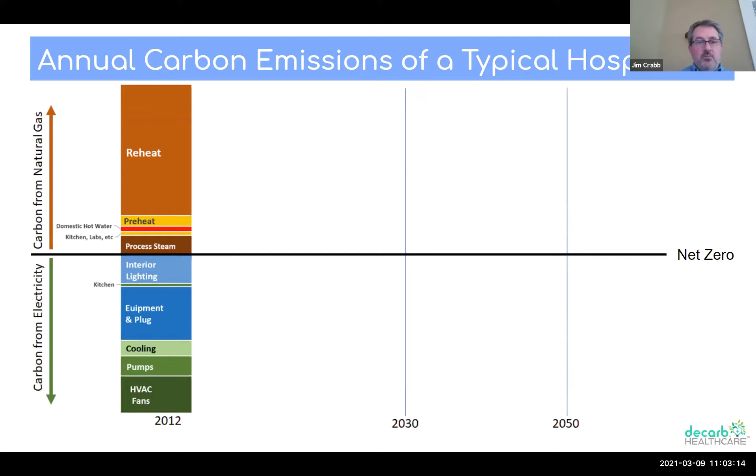Click. I have an automatic clicker here.

In that last session, we talked about ways to reduce reheat. And what I've done here is I've just arbitrarily said we'll cut reheat by 50%. That's a pretty reasonable assumption. We can actually do better than 50%, but let's just start there. We're going to have some reheat probably as long as we have minimum airflows in hospitals. And we're also going to have heat needs, and heat and reheat kind of got dumped together here. So that's fine. That's a nice substantial reduction in carbon emissions.

But the problem with doing that with natural gas is that it never gets any better. We're locking in carbon emissions for decades. And as we know, many parts of the country, including California, have made commitments to reduce the carbon emissions of the electrical grid to 50% by 2030 and net zero by 2050.

So the carbon output of the electrical systems in buildings will head toward zero, but combustion systems never get any better. The emission rates on day one will continue for the life of that equipment, which could be 20, 30, 40, even longer. So we could think about transitioning from old steam boilers to high efficiency condensing boilers.

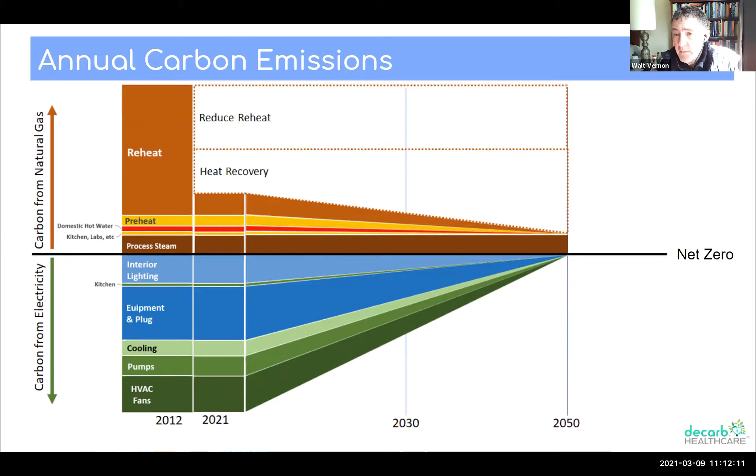One of the things that we know for sure is that in California in particular, the CEC is pushing us towards electrification, and the governor is pushing us towards electrification and continued progress at reducing combustion and carbon into the atmosphere. So in some ways I would say it doesn't even matter if there's capacity or not. We are engineers, right? That's our job, to figure out how to make it work. I think this should not be an issue.

Maybe the last thing I'll say about all this, it is an interesting policy question, not for us so much at a building level, but at a policy level about the grid and grid capacity if we all of a sudden quit using natural gas and start using electricity. I'm sitting here in Marin County, and we're talking about an all-electric code for our new buildings, right? So these kinds of questions are on everybody's minds.

But I think as we continue to develop new solutions for on-site generation, I don't think we need to worry about the electrification issue. We need to just go and do it. And so with that, I want to hand the baton back to those of you who can figure out how to get it done.

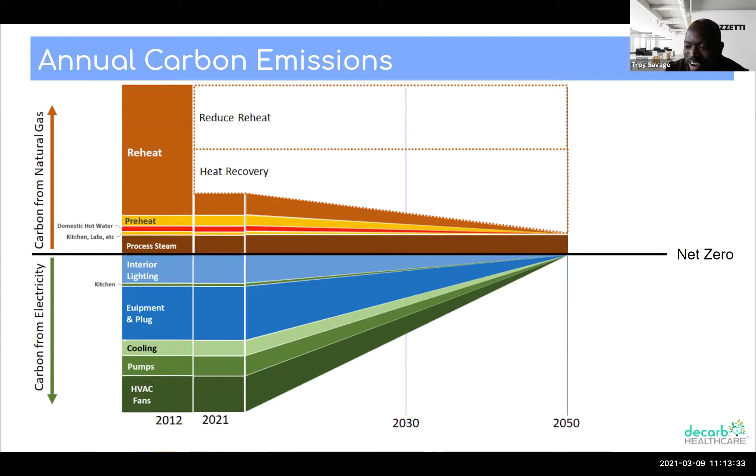Awesome. Thank you, Jim and Walt. We're continuing with our rapid fire. We'll next hear from Mark Stavig, a mechanical engineer, who's going to talk about geothermal heat pumps. Take it away, Mark. Thanks, Troy. You can slide to the next.

This was a great opportunity for this project for a couple of reasons, one of which was there was no natural gas on the island, so that led us away from the carbon challenge we would have. But also the design team, the architect, the contractor, and the owner were very committed to energy savings, so we followed the Living Building Challenge, which had a net zero energy goal for the project. So we decided the best opportunity would be a ground source heat pump system. The original thought was trying to get to an EUI of 55.

Due to budgeting and some other issues, it ends up operating somewhere right around between 85 to 100. It kind of depends a little bit upon how active the hospital is at the time. The systems are broken up into decoupling and minimizing reheat, all those things to help minimize the impact on a system to allow our heat pump system to operate as efficiently as possible.

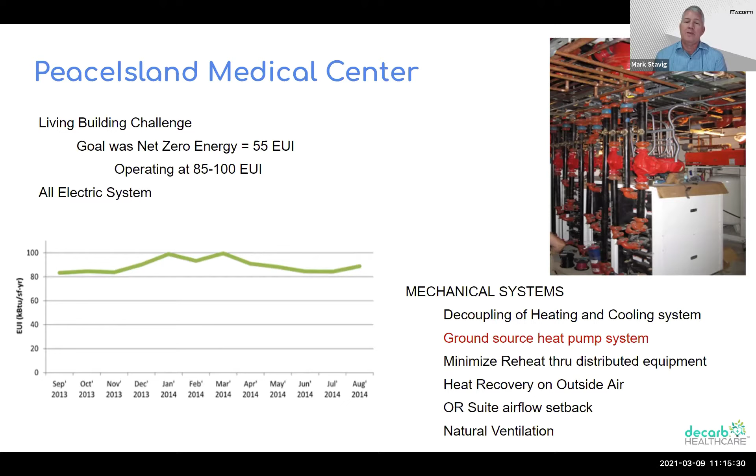So the 4 blocks in the middle, those are the actual water to water heat pumps. The 2 on the left are in cooling mode pretty much most of the year. The one on the right in brown is in heating mode most of the year. And then the second one over from the left kind of splits between heating and cooling mode depending on the time of year. And so each of these heat pumps is creating either a chilled water or a heating water that's being supplied out to air handlers and fan coil units distributed throughout the hospital.

And so they're rejecting their heat to that blue box at the top. If they're in cooling mode, they're rejecting heat into that loop. If they're in heating mode, they're rejecting essentially cooling into that loop. And so that loop in the middle is the condenser water loop that circulates, and during certain times of the year, the spring and the fall, it kind of is self-supporting. They get heat from the ones that are providing cooling and cooling from the ones providing heating. And so it kind of self-works its way around.

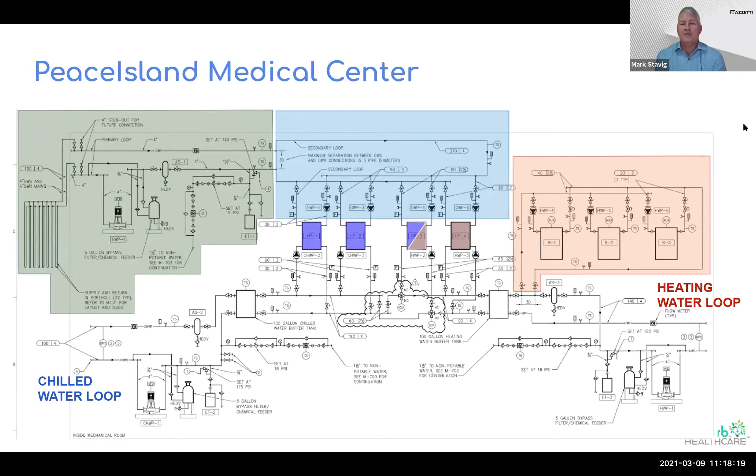On the right, that orange area is essentially the backup electric boilers, which are code required by FGI, and I don't think they've ever had to come on. So that's how the system works at the facility. Next slide, Troy. And what Jim talked about earlier is condensing boilers are 99% efficient, whereas a heat pump running at about 2.4, you can see it's 2.5 times more efficient than a condensing boiler. So not only are we not burning fossil fuels, but it's a very efficient operation. So that's a case study of Peace Island.

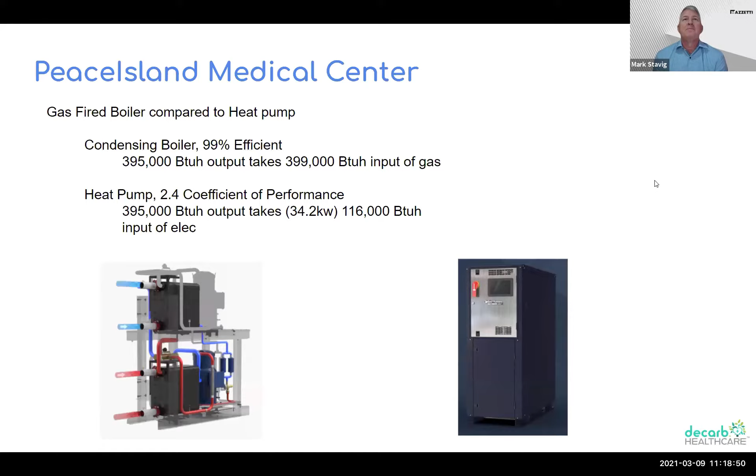Great. Thank you, Mark. I am now incredibly excited to introduce Dr. Monica Weiss, who is going to talk about solar thermal systems. She'll share a little bit. Her knowledge on this topic is deep. Go ahead, Dr. Monica. Hi, everybody.

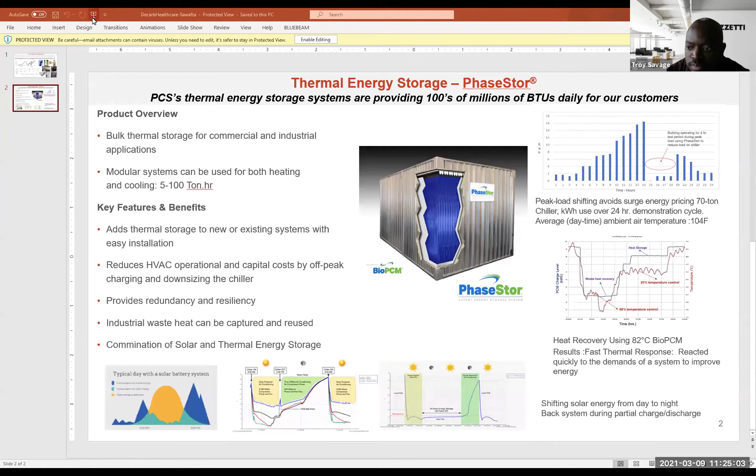Oh, Dr. Sawafta, if you're speaking, you're on mute. Oh, Dr. Sawafta, there you go. They're not ready. They're not ready yet. I have to go. Okay. They started. Okay. Thanks. Bye. Oh, Dr. Sawafta, go ahead. Yes. Hi. How are you? So I know we have 3 minutes. So I just sent you 2 slides. So I will just scan through the basics, and I will focus on the thermal energy storage. Great. Perfect. Yeah, your slides are on the screen. We're excited to hear from you. Oh, you want me to start?

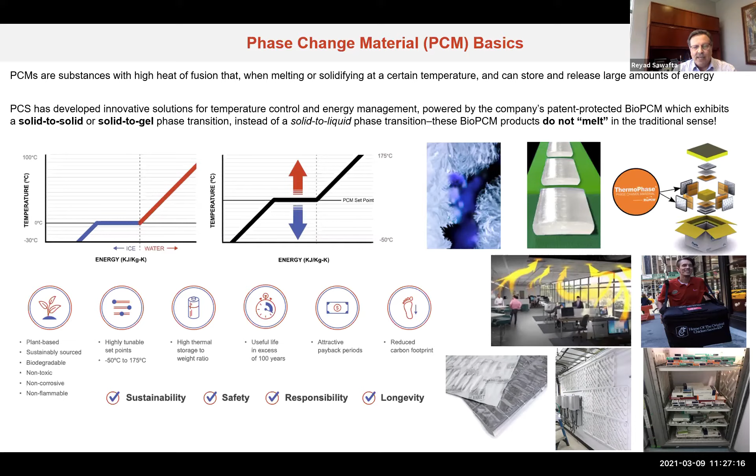Our technology is plant-based, biodegradable, with many applications today on the market, from building to pharma to food. We provide delivery for Chick-fil-A, for McKesson, Cardinal Health. We have smart refrigeration shelves for the freezers and refrigerators to keep them at the right temperature when power is interrupted. Next slide, please.

The second application, which I think is relevant to this group, is thermal energy storage. So today, the company, we provide thermal energy storage in bulk for commercial and industrial applications. We have modular systems, 5, 10, 25, up to 100 ton-hour, that can be rolled on wheels through commercial elevators. We can also have 500, 600 ton-hours.

The key advantage of our technology is that you can store the energy at the right temperature for whatever application you want, cold or hot, from -50 degrees, or even for thermal energy storage in waste heat recovery applications. I show you here 3 applications on the right corner. We are showing that in an application in California, on a 104-degree day, we were able to store energy in the tank and use it in the mid-afternoon. This is before the peak demand was shifted to the night.

And the last example on the bottom is showing you that you could add that into solar thermal, store the energy during the day and use the sun at midnight. And a third application, which is at the center, is the heat recovery, where we can store temperature at 80, 85 degrees C and recover it with very little loss to be used for heating and dehumidification for plants, for cafeterias and so on.

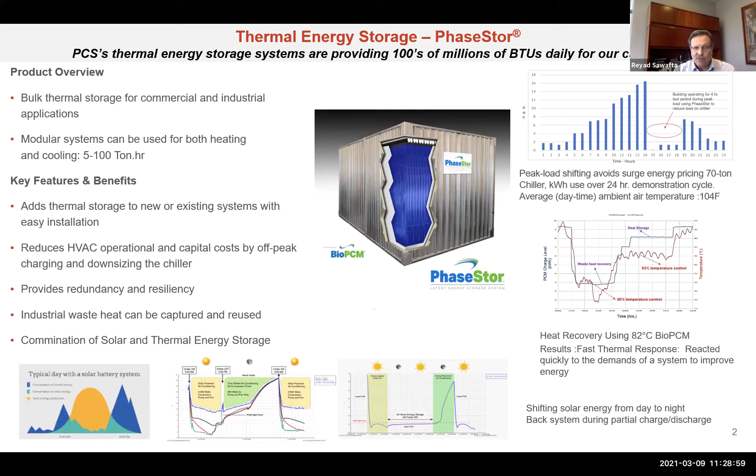Perfect. Thank you so much to all of our rapid fire speakers. I think they've told an interesting story, right? So Jim started off by saying the story is that even when we eliminate some reheat, there's more opportunity we need to take advantage of. We can take advantage of that using innovative technologies, right? So things like heat recovery chillers, like using the power of the ground in geothermal, using the sun in new ways with solar thermal, using the material properties of substances to set a particular change in energy, like phase change is doing. These are examples of the type of solutions that might help in healthcare.

Just before we break out into breakout rooms, I wanted to give one quick question to Jim to start off, and maybe one other panelist to respond. Jim, based on what you've heard today and the model that you set up, are there ways you can see in which these technologies might integrate to help us eliminate combustion in hospitals?

Absolutely. One of the issues that we have in moving heat around is that it's rarely where we want it, when we want it, and it's rarely at the temperature we want, when we want. So an awful lot of the excess heat, all this energy we're pumping into a hospital, is at a very low grade, low temperature. We're dumping air out of the building at 75 degrees. You can't heat anything with 75 degrees. So a heat pump is a way to raise that temperature to a place where we can use it. But we also have the need for heat at times when we don't have enough heat in our buildings, and that's where storage comes in.